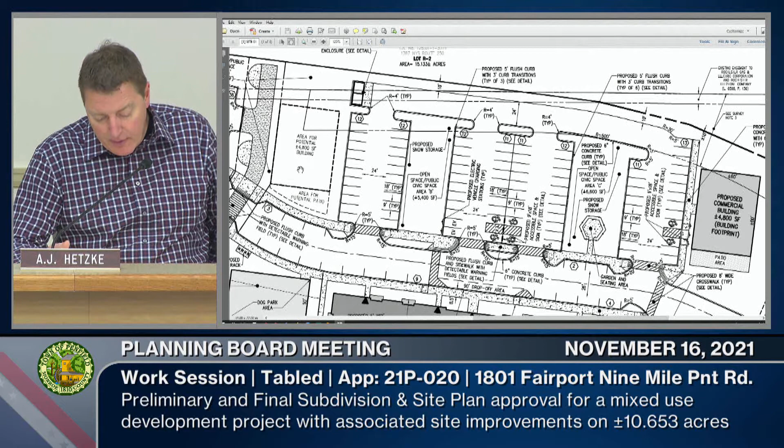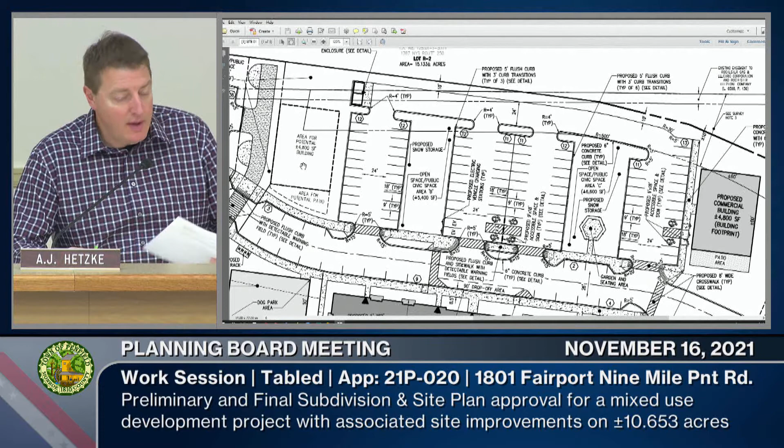So, I guess one thing I'm struggling to get my head around is, while I think they've done a nice job on the architecture and design of the buildings for what they are, and there's a lot of things I like about it, I'm still struggling to see how this has that mixed-use villagey feel that we really want to make sure we get here. And this application, and the others before us, are critical for the entire district - if we're going to end up with that feel, we need to really focus on that now. I know I'm one of five members, so I want to hear what everybody else thinks about this, but I'm struggling to say I'm there yet on this.

That commercial building along the pedestrian spine helps move in that direction, but when I'm trying to envision when this is built out, what kind of environment is it going to create? What kind of community is it going to create? Is that pedestrian spine going to be desirable, or is it going to be just a walkway, a path to nowhere? Or is it going to be a vibrant, busy, lively place?

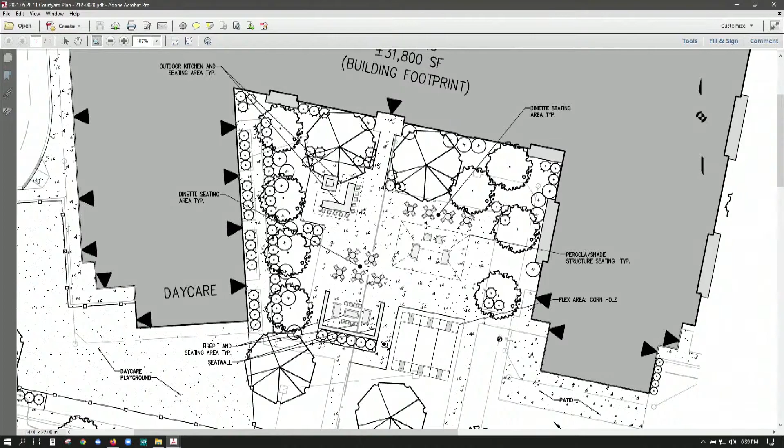passive recreational uses. They were proposing a mix of seating areas, lounge areas, outdoor cooking, as well as some sports courts, whether cornhole or bocce courts or something like that. I think it's labeled cornhole on one side, and on the other side a playground for children, separate from the playground for the daycare facility, as well as a passive recreation gazebo.

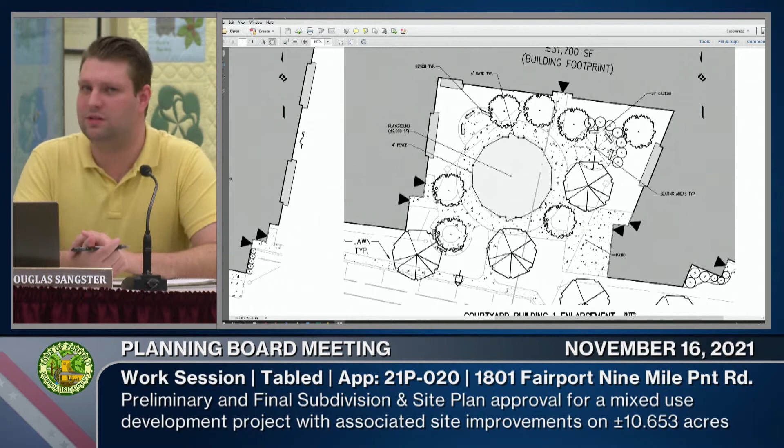The playground is in that area. So it leans towards recreational uses, which we have largely included in our open space, or considered as part of our open space in previous applications. And they are showing a variety of uses that aren't just open grass area.

Yeah, I think we may have brought this up before. I think it would be helpful if we could see, for 3 locations, the 2 courtyards and then the pedestrian spine, some kind of street view of what that's going to look like as this is developed. I think that would give us a better idea, visually, of what it's going to look like.

At least 3 perspectives: the 2 courtyards, and then from the south looking north into that area. So looking north into each courtyard, and then also on that pedestrian area, maybe starting at the parking lot, what that visual would look like. From north to south or south to north? For that, it'd be interesting to see both.

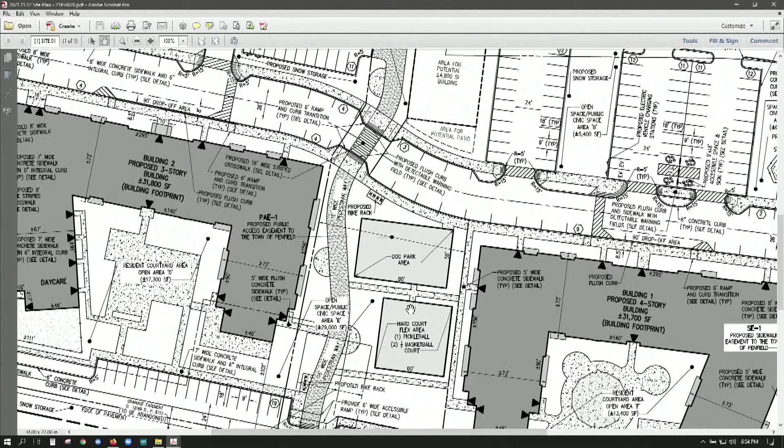The one thing I like about that potential 48, I don't know why I'm calling it that, is that it creates sort of a streetscape all along the way, or it helps. True.

So if anybody has a different idea, I'm totally open - the one thing I like about this board is that everybody has their own opinion, so I want to hear them. You don't have to just agree. I'd like to know people's thoughts.

What are some of the other things that - I mean, I'm still struggling to get past that, so I know I'm kind of caught up on that. Architectural rendering? Well, go ahead.

I just want to say, in our notes, the town staff shared with us that they have not yet had an opportunity to fully review the most recent submittals, so we're still collecting comments, and it would be inappropriate for us to try to close the loop on this when they haven't done it yet and we don't have their notes.

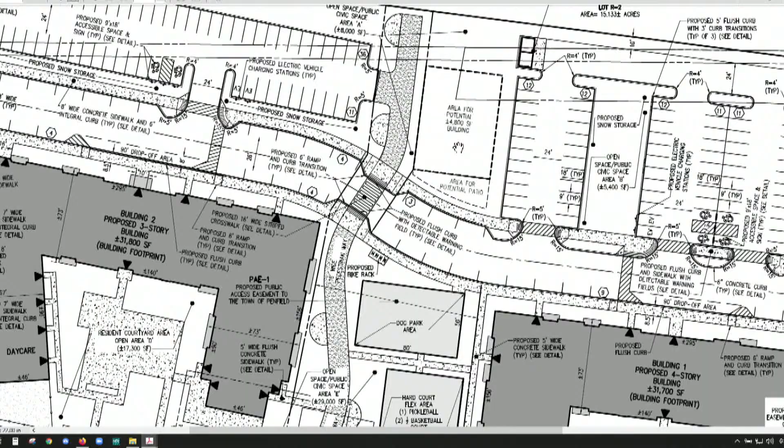And I guess one thing I'd like to follow up on is the potential 4,800 square foot - I thought that was more of a definite thing. I'd like to know what the intent is with that. My understanding was that was more real than the dotted line when we talked about that. And if I'm wrong, then I'd like to be reminded that I'm wrong.

Okay, that's something we can certainly ask. I think my understanding is that they were looking to get the comfortability of the board with the idea of the building there, and if the board was comfortable with that, it could be something they keep on the plan going forward, but if it was something the board was not supportive of, it would be something they could revert back or modify.

Okay, so then I want to informally poll the board on that. Do you guys like the idea that that building there on the north central section as a commercial building right along the pedestrian spine? You'd have parking just to the east of it and probably some to the west. That drive, the east-west drive to the north side of the two main buildings, becomes kind of a street with on-street parking.

So that could be like a cross street. Well, I think we have to know what kind of a building is it going to be. Is it going to be a two-story restaurant with balconies and a patio? Is it going to be a clothing store? What's it going to be? I have no idea, probably premature for them to determine that. But if it's along the pedestrian spine and it's something, like I've said before, that would attract people to it, that's a good thing.

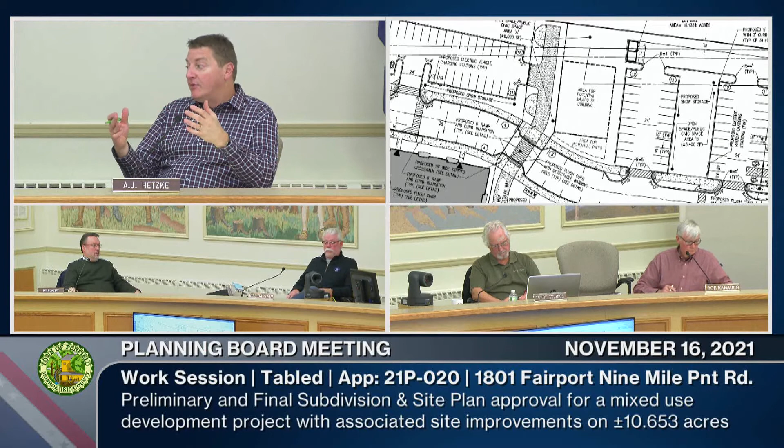I don't think necessarily that we fault the site because there isn't anything to the north. I mean, there wasn't anything to the north of the first project. And this whole mixed-use community, we did have that bridge and that archway that was supposed to be kind of a gateway to the rest of the district. But I think it's important that we remember that this entire block of land was always intended to lead to the north, and that the pedestrian spine and the main street would continue that pathway. So, who knows what's going to happen, when that's going to happen, and what's going to be visually interesting.

As it stands right now, if this project were built tomorrow, there'd be nothing but an open field on the other side. But eventually there will be other things of visual interest and other reasons for residents and tenants in the community to bike or walk or what have you. Hopefully, if we do this right, it'll just continue to evolve.

This is the first time that we, as a board, have reviewed the east-west change of the street, the entryway, moving to the south of that eastern commercial building. And that was a request that came through State DOT, who was looking to increase the distance between the entry for this property and Sweets Corners Road to the north.

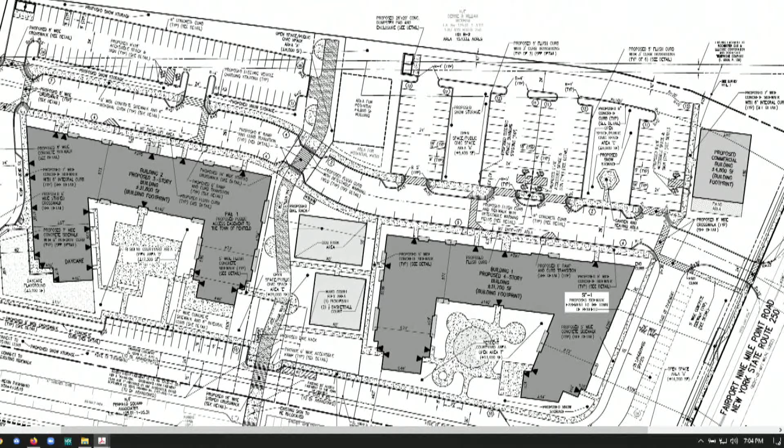Certainly, and I think moving the entry lane there to the south does help provide a more interesting entrance to the development, because as you come into that road you have the buildings on both sides. The building to the north will hide some of that parking, so you'll see the buildings on either side and the main street, complete street, heading down as you're going west. So I do think that was effective as a way to hide some of the parking and provide a more visually interesting entrance.

The potential for that additional building is another area where you can work to hide the parking to the north, or hide the parking on the north side across from Building 2, while providing some visual interest as the road sort of meanders around there.

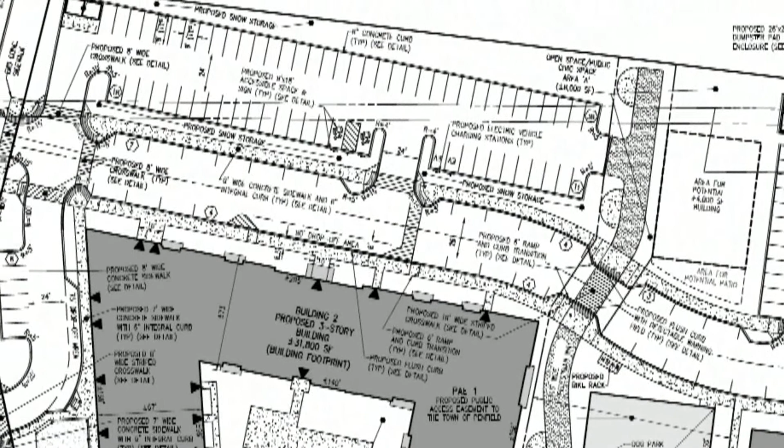There is the potential in the future too, and it has been taken into consideration as part of this, that when the property to the north develops, there may be a primary intersection with Sweets Corners Road as part of that development. In doing this, it sets this development up for the potential that it could tie into what would be a larger intersection with Sweets Corners Road, potentially signalized in the future, as that north property develops, whether that's next year or 10 years from now.

I've got a question, or maybe just something to consider. Is the property right now at maximum residential density? I ask that as you think about these out parcels as commercial — give some thought to what happens if these are subdivided off. Will a subsequent owner come in and ask for more residential in those parcels? So just to think about that in the big picture, so we avoid what happened to the south.

That's a good question. Where are we at? As proposed, they're at 12.8 units per acre, being fully within the Zone A mixed-use district. They're allowed up to 20 units per acre per Table 6.1.5 in the mixed-use manual.

And what is the total right now — the proposed commercial space, where are we percentage-wise on this? I believe they're at least, as they're showing their non-residential, commercial and non-residential — I think they're at 22.5%. That includes the daycare's playground, the office space in Building 1, and the potential future commercial building and its patio area.

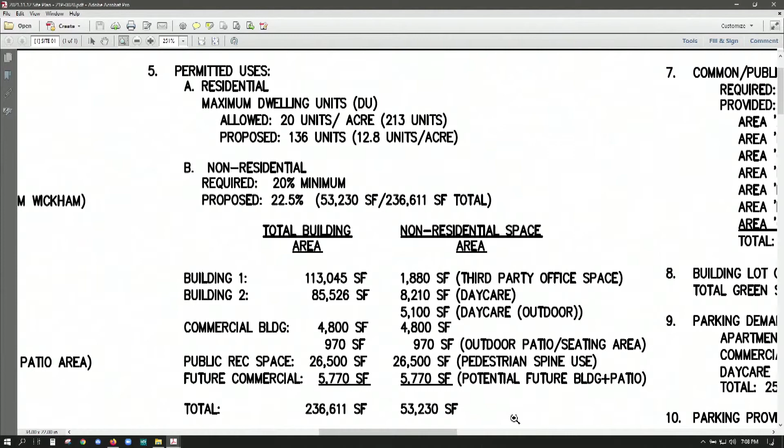What else can we cover tonight on this? So they did provide us with some architectural renderings, which include callouts of the specific materials proposed to be used on the building. They also have physical samples of those materials, and if the board is interested in taking a look at them, we can grab them and bring them up front.

You guys want to see physical samples? Sure. Okay, you want to bring those up? Yeah, they want to see them. You get to do a little walk in front of us exercise with it, like Vanna White or something.

You're going to have to go up to the front. Mary, if you want, you can introduce the materials in there, what they are from. Are you guys interested in hearing a little bit about the material choices from the applicant?

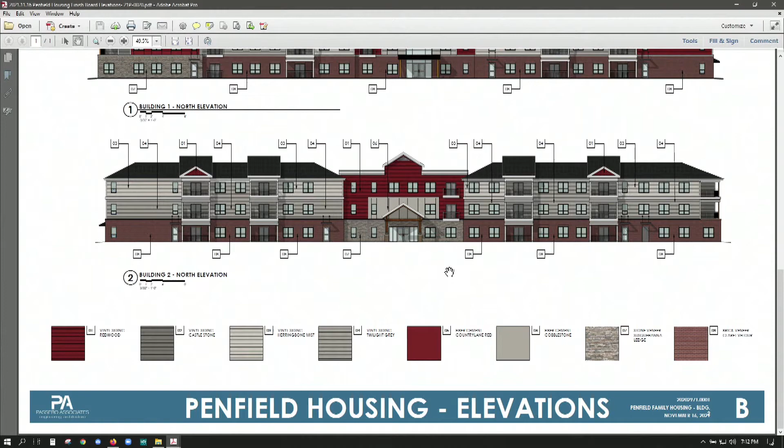They're showing a combination of 4 different colors of vinyl siding, 2 colors in the fiber cement board, as well as a brick veneer along the first floor and a stone veneer along portions of the first floor. The vinyl siding will be on the upper floors, with the fiber cement as accents along the central area of the building and the corners.

Any comments, feedback? Want to take it in? What are your thoughts on that?

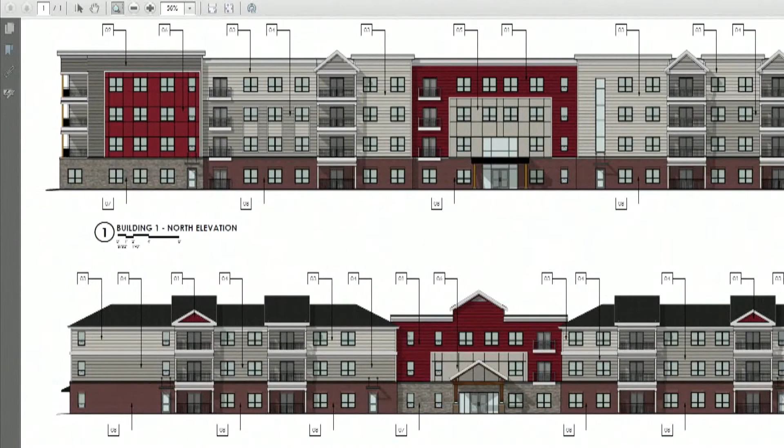So most of it's going to be this dark brick, most of the building? The first floor, right? The first floor, the more robust material. Upper floors would be this stuff. So most of the first floor would be this and this down below.

To look at them, you actually have to look at the whole color scheme. You have to put them all together, then they will start working together, because it's hard to see how it works if you just look at the brick and the stone separately. If you put the brick next to the stone and siding next to the stone and brick, you'll see that all the colors create a color scheme that works together.

Okay, so the main entrance is going to be this, where the main entrance is to building 2, yeah. Building 1 looks like it's the brick, if the main entrance is at that center. Kind of like that one, more than the dark, I think.

You know, this all across as opposed to this? No, if you look at the north elevation on building 1, it looks like brick across most of it, but at the eastern portion, maybe the corner at 250, that's stone.

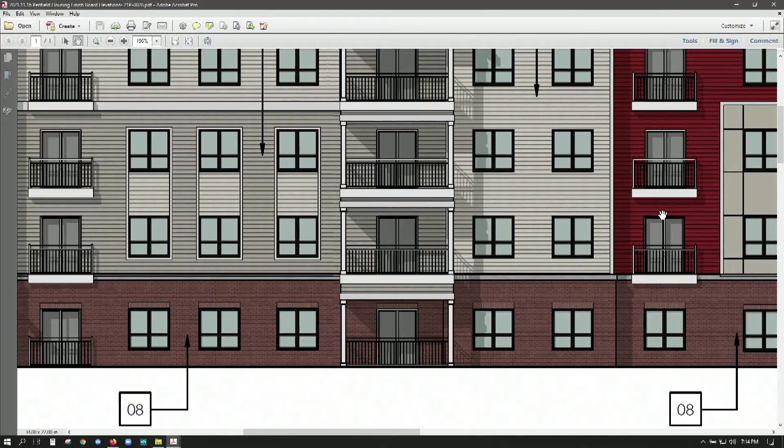Right, stone is an accent material, so it's only... Of course, I have expensive taste, so that's... I'm sorry. Yes, you do. I got outvoted, okay.

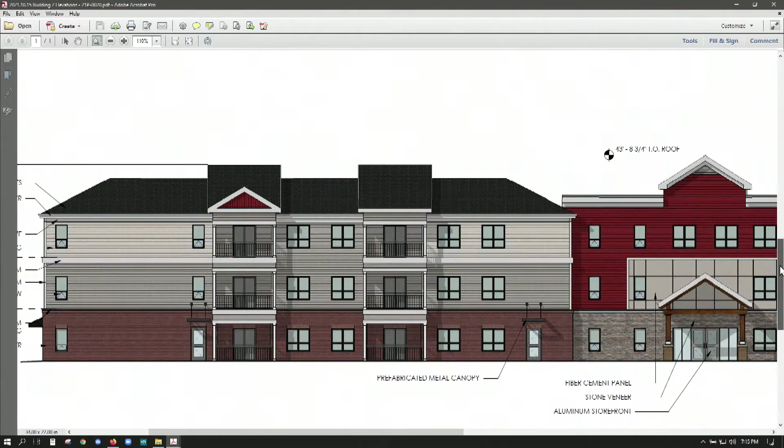Okay, so that's the eastern elevation of Building 2. Let's go back up to the top. No, the other one, go back. Yes, that one. That's the east elevation, the eastern elevation of Building 2.

And the western elevation of Building 1. The one below is the west elevation of Building 1. She's opening that up right now.

Okay, so what's the material on the first floor of that? You can see stone there, but I have to apologize, the printout distorted the color, so it looks much more yellow than it really is. It would be the same as the other building.

Those look like stone-clad columns? Stone is under the balconies. Right.

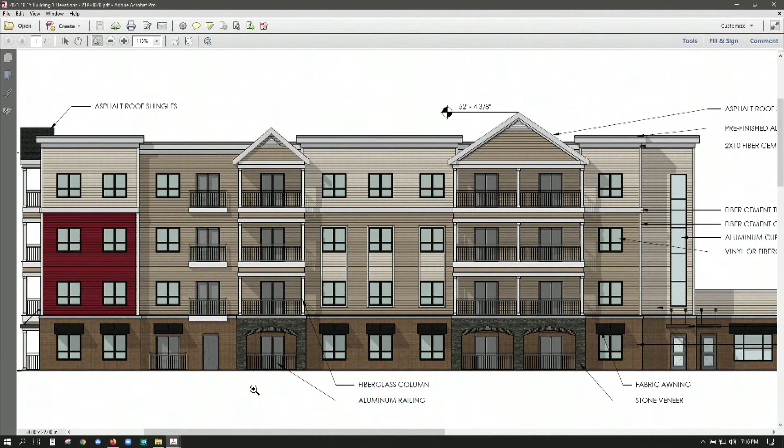This won't get VE'd out. So far I was able to stand up to them.

Yeah, I mean there's a lot of vinyl. I have to tell you, there's not a ton. Yeah, stone and brick, but there's a lot of vinyl.

So, well, it will not be VE'd out of the main elevations of the building. The courtyard may lose it. Well, the courtyard never had it, but anyway.

Do you agree? What's that - you like that better than that? The stone? Yeah. Well, I kind of like the combo, the percentage of one over another.

I'm not sure I have a fully formulated opinion on that at the moment, but in many ways I trust Mira for her work and skills on that. Thank you.

We don't have to order it today. Yeah, all right, so...

Moving in the right direction on architectural? Yeah, I think it looks pretty good, I like it. I know we've tried to minimize vinyl in the past.

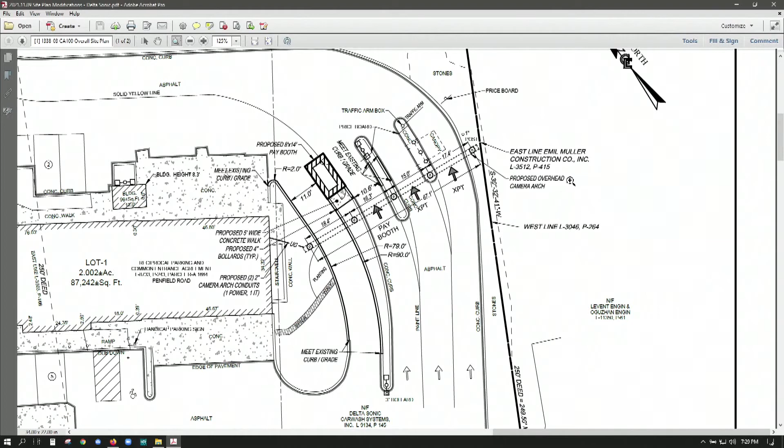The site is at its green space maximum of 70%, and they would be adding a little bit of pavement with this change. So staff asked them to see if there was another area on site that they could add some potential green back onto the site. So they did show, on the west side of the property, taking what was currently just a striped pavement area as a landscaped island now.

We have sent this off. Staff has reviewed it, engineering only had some minor concerns. We did send it off to the fire marshal. The fire marshal did come back and have some concerns on both sides of the property. They're taking a look at what the requirements would need to be for the arch for the camera system. As shown on the cut sheets, it's about 10 feet tall, and that can be altered. But the fire marshal was concerned that it would be too low for their emergency vehicles to try to get to the back of the site if needed.

So they can't get a fire truck underneath the camera arch? He's concerned that it would be a pretty tight fit with their current apparatuses. His concern was that they would never likely try to take a ladder truck to the back - they would access it through the front - but they may need some other equipment that would have to go to the back. He was also concerned about the height of that system, as well as the swing bars, with a maximum height of 8 feet, which might not meet the fire chief's criteria.

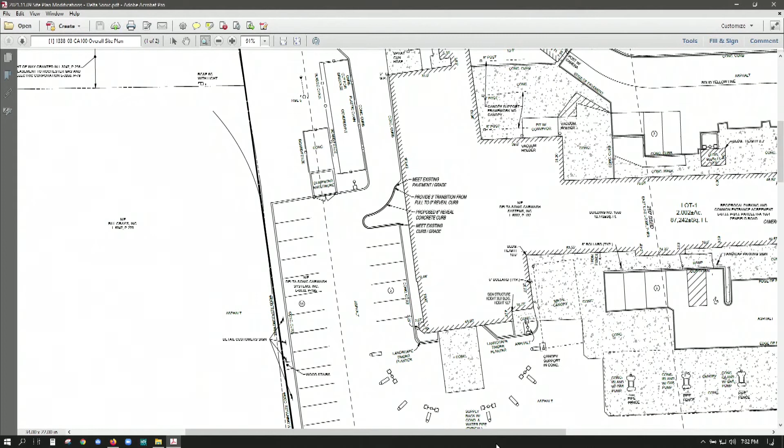Yeah, so I believe my fire marshal was looking at, I think he thinks it's 13.6 is his requirement, but he's double checking that against the fire code, just to make sure there's adequate access for emergency vehicles. They did take a fire truck back there earlier this year, or the end of last year, and they were able to do it. But he did comment that they had some concerns, and if they're looking to redo this area, he would ask that we work to make sure it's more accessible. Should the need for it hopefully never arise, but should it arise, that they would be able to adequately get equipment back there. Any thoughts?

You guys all know what they essentially want to do? I was just through there 2 days ago, have no issue with this at all. I would be comfortable with moving this forward, subject to the fire marshal's acceptance of the plan.

Yeah, I agree, I agree. Yeah, no problem, I subscribe, I go through there all the time. Thank you. You're welcome. Whether or not we subscribe has nothing to do with this. I know, I'm just saying I go through there. Nothing to do with this, sometimes, but I have no problem with this.

Okay, so we could potentially move it with, subject to the final approval of the fire marshal? Yeah, we could do that.

I guess within reason, in terms of I don't want some giant massive structure sticking up over everything in Penfield. That's not St. Louis, that's not the Arch. We're not going to let that happen. Yeah, understood, yep, so understood.

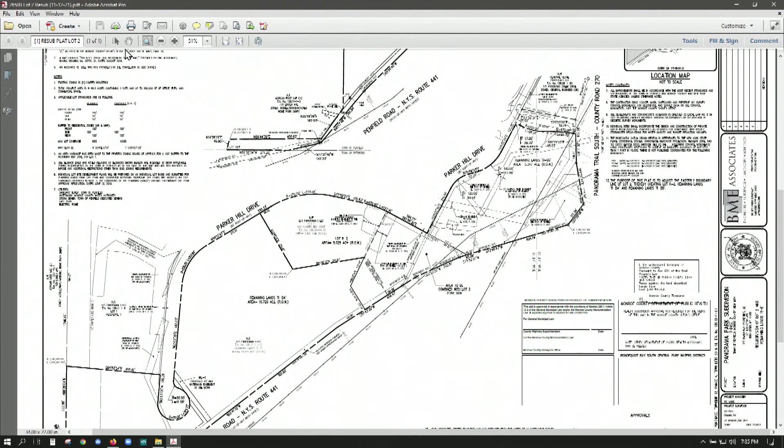They are in talks with Rich Lefroy to purchase a section of property from Rich and add it into their site. So it would be a lot line shift. They would just be adding some additional acreage for future potential expandability.

So essentially a lot line shift, yep. Any concerns, Mike, from engineering department? The only thing we would want is there was an existing stormwater inspection easement that they've had to relocate, that we'd have to have abandoned. That's about it.

Any concerns from you guys? Somebody want to move to approve? Tidings, make the motion to approve. I'll second.

Hetzke, aye. Bastian, aye. Burton, aye. Canower, aye. Tidings, aye. All right, done, good job. All right, and then one last item, in our held items, 280 Panorama Trail.

Back in September, our work session in September, the board sent a letter to the applicant stating it had been about 2.5 years since we had heard anything from the applicant, and that the board was requesting either the applicant come back in with revised plans, potentially an additional hearing, or withdraw if they didn't have any interest in moving forward. We did receive a letter from the applicant stating they are interested in withdrawing their application from the planning board's agenda. Okay, so that's withdrawn.